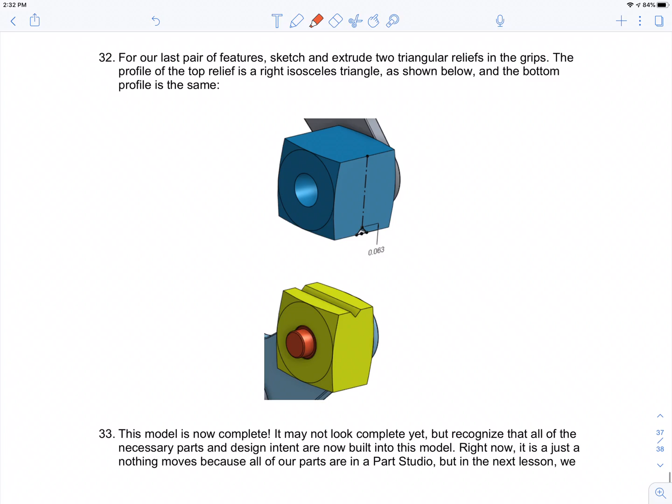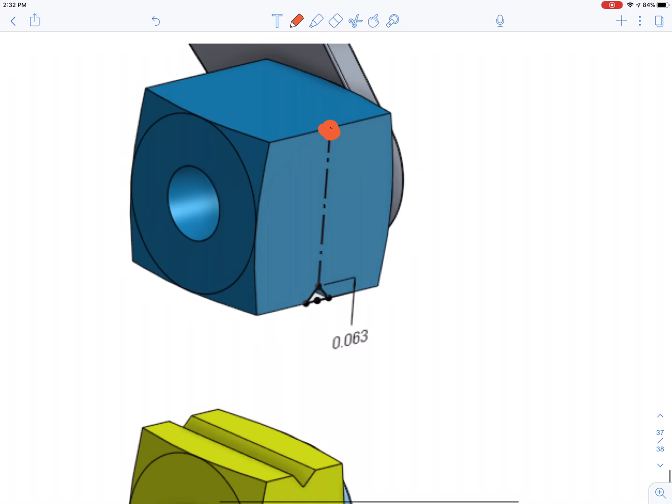For my last step, I'm going to create this little ridge that you see here on both grips. What I need to make sure I note is that this line is attaching this midpoint with this midpoint right here.

That's why I'm going to draw that line first. Then I'm going to connect two lines, just making them connect to any point. It's gonna look like that basically. And what I'm gonna do is set them equal to each other, clicking one and setting it equal to this one over here, so they're both the same length.

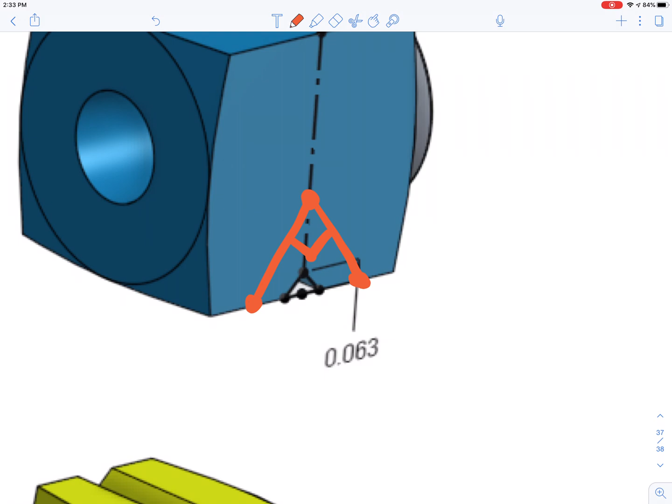And finally, the last step I'm gonna do is set them at an angle perpendicular to each other. Then I'm going to set the distance between this point and this point to be 0.063, and that's how I'm going to get this little notch right here.

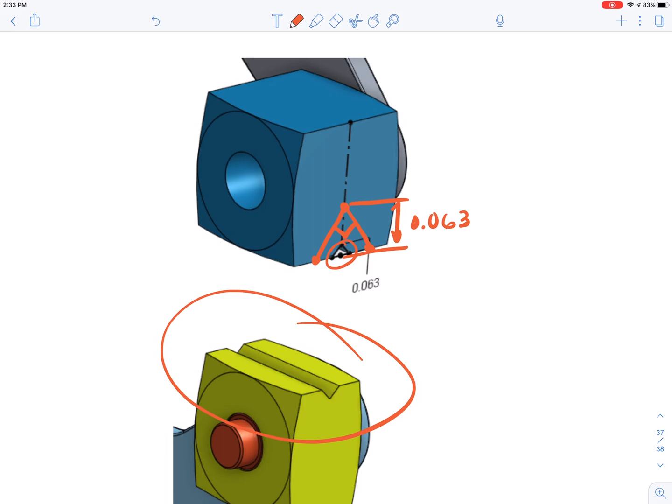After that, I'm just going to extrude it to the back face and I should be done. I can repeat that process for this piece right here as well, so I'm only going to do that once. That is the completion of the sketch of the clamp for lesson 3. So let's get on with it.

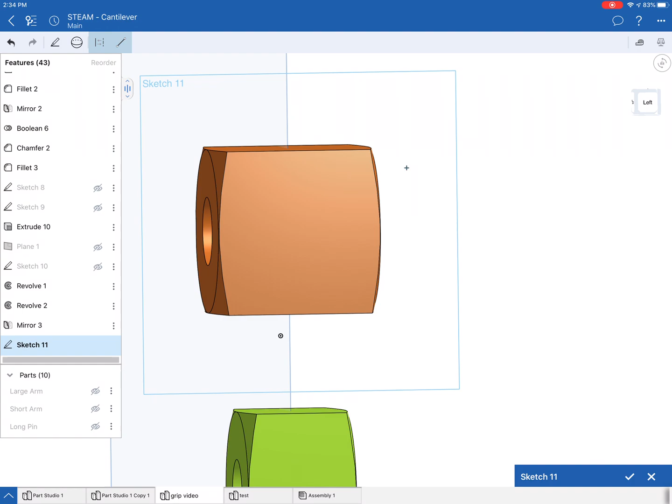All right, I'm going to click on sketch, and use this face as my sketch. I am going to click on line to make my construction line. And what I'm going to do is, let's click on that.

I want to angle it a little bit. So I'm going to click on line, sketch, and let's undo that line. Click on line, construction, somewhere in the middle, good. So that line is set in the middle of my sketch. I forgot to unclick line, so I drew an extra line I don't need.

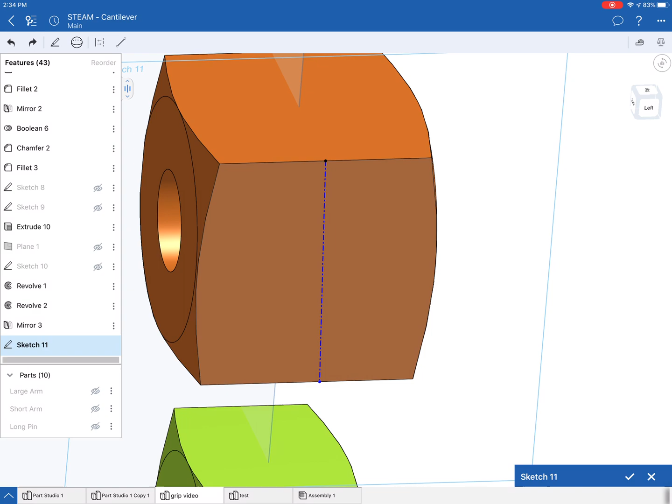Now I'm gonna draw my other two lines, and those two lines that I'm gonna draw to sketch out the little notch are not going to be construction lines. So I'm just gonna do a line from anywhere, as long as it's touching.

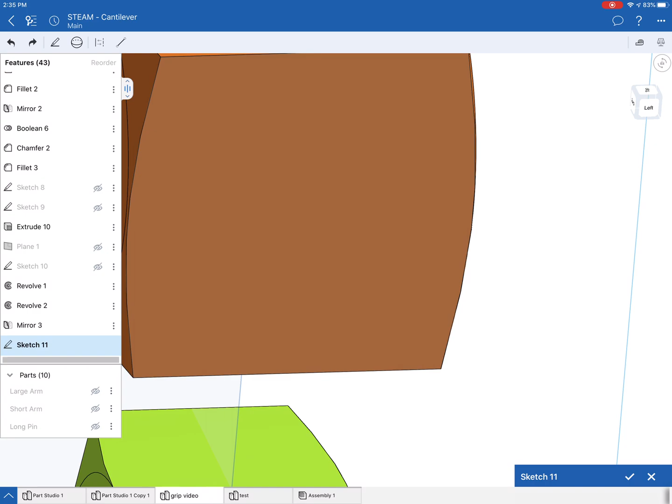This takes forever too. As long as the line is touching, I did it again, let's do it again. This line and this line at any point, and then this line. Boom, I'm done. Now it looks like it's perpendicular, but that doesn't mean anything.

I'm going to click on this line, click on this line, and set them equal to each other. Boom, boom. Now, obviously, they're not at right angles to each other, right?

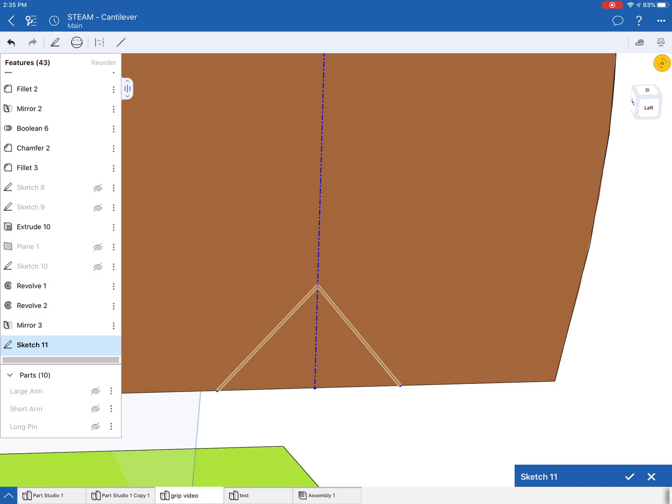What else I'm going to do is make sure that this line and this line are perpendicular to each other. So I'm going to click on this. Boom. So now it's an isosceles triangle, and that's what I want it to have.

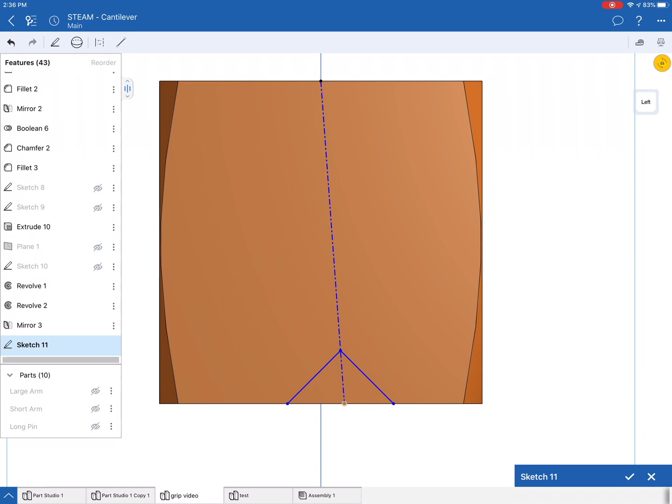And let's do this left. That line is not set to the midpoint of this, so I'm going to click on this, and click on this line, and say midpoint, and now we're set up on the midpoint. Now we're set straight. So this is our right angle, and these two lines are set equal to each other.

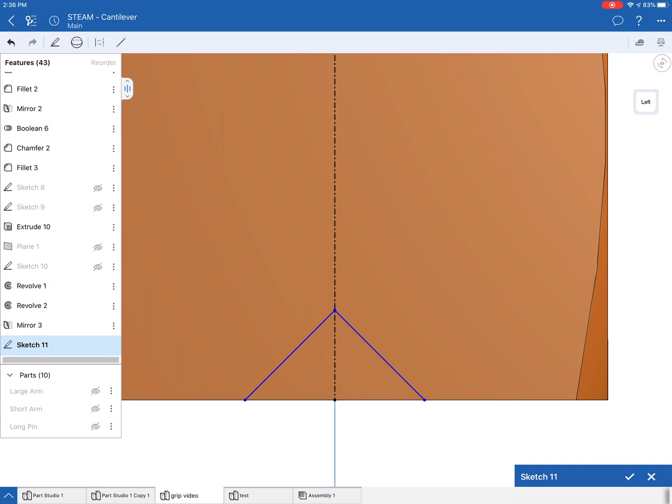The only thing I have left to do is make sure the distance between the vertex of the triangle and its base is 0.063. How I'm going to do that is click here, click dimension, and click that point and this point, and set my dimension to 0.063. Boom, I got exactly what I need.

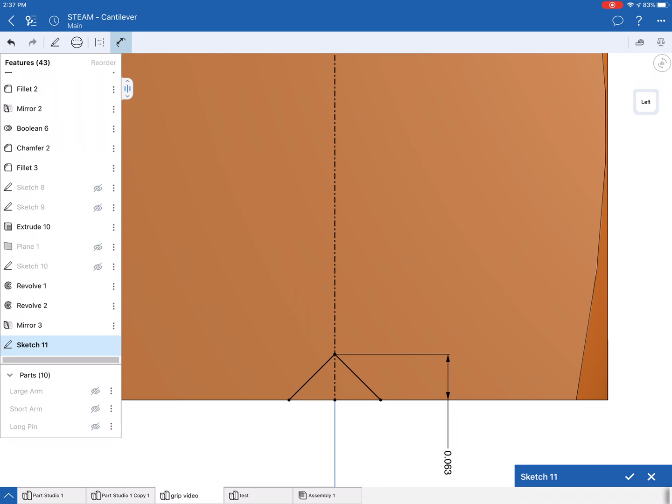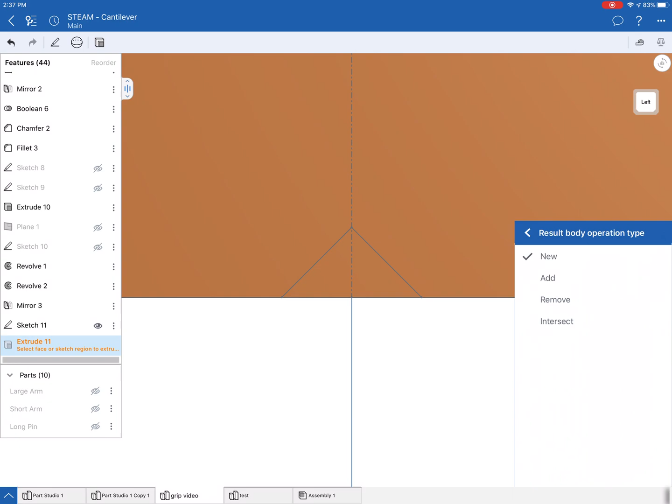I'm going to unclick dimensions, and now I'm good to go. So next step is to extrude that piece all the way through to the end and remove it. I'm going to click my object menu, extrude, and click on here, and it's going to say remove. What entity has been selected?

I haven't selected anything. Face of Sketch 11, no, delete that. So no entity selected. Now what I'm going to do is click on this. Boom, and it's been removed. Now it says blind 1 inch, right?

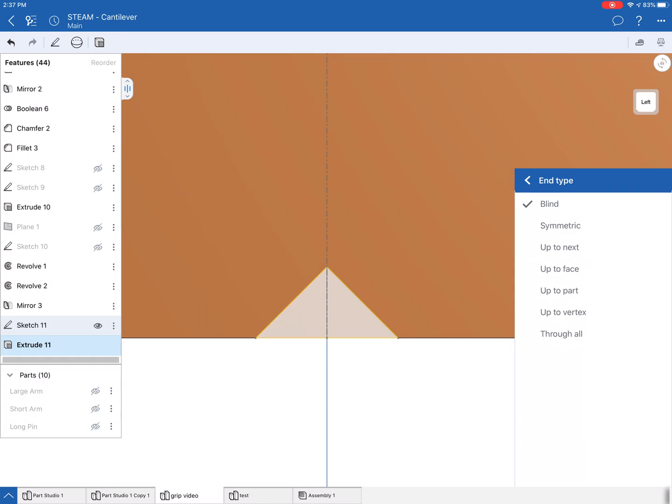So what I want to do is use up to face to make sure it goes to the right place, because if I have other pieces along the way of that removal, your clamp is gonna be missing a triangular piece somewhere. So all I wanted to do is remove up to that face. That's it, and oh no, I messed up.

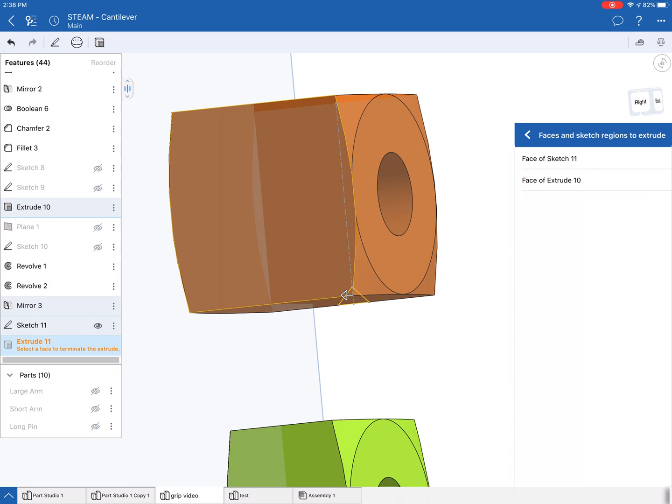So I'm gonna take off that face. Okay, so up to face, I'm gonna click here and boom, now I have my notch, and that's exactly what I want it to look like. I click OK and I'm done.

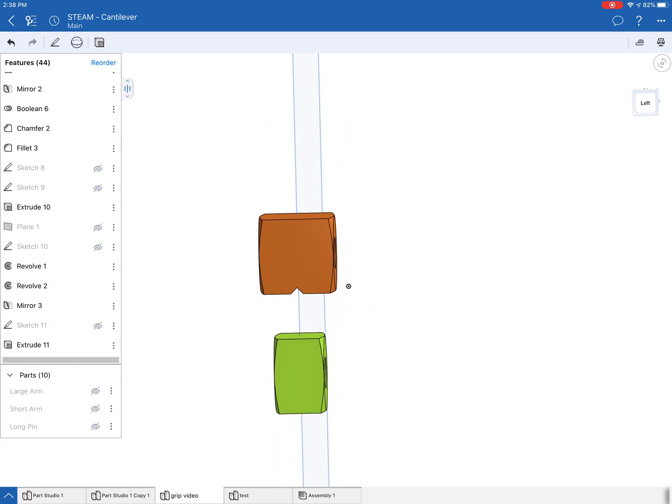I'm gonna repeat the same process for the drawing down below it, but it's gonna be on the top part because those notches have to match each other. Your end result is going to be something like, oh sorry, that's the wrong one, it's gonna be something like... eventually it will load... something like this.

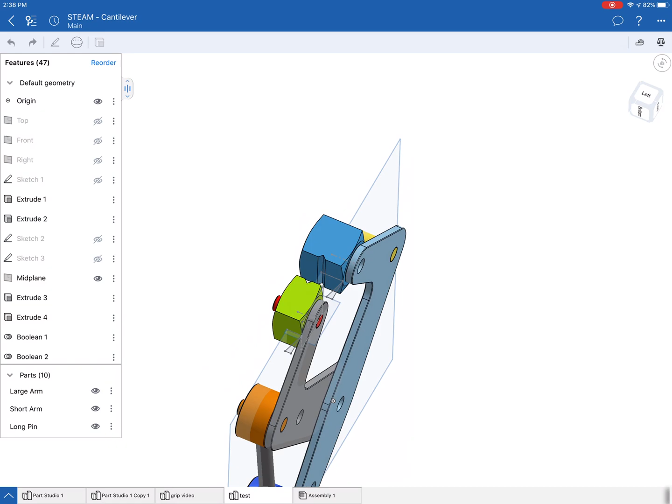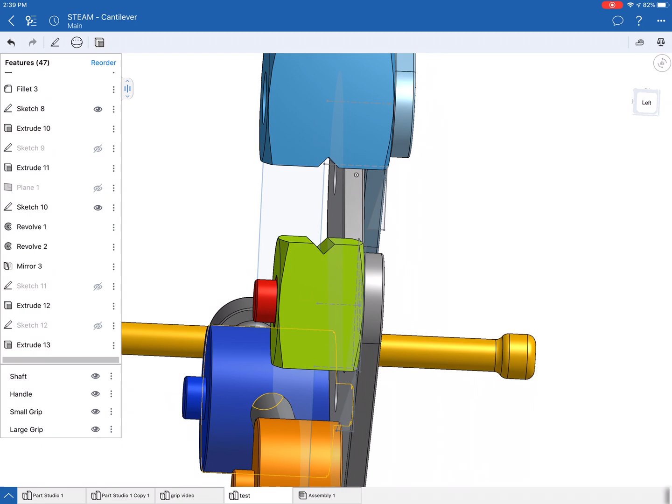And that is your clamp with the 2 notches. What I'm going to do is remove some of these sketches so you can see it. Plane one removed. And yeah, that's it, all my sketches are removed, and you can see.

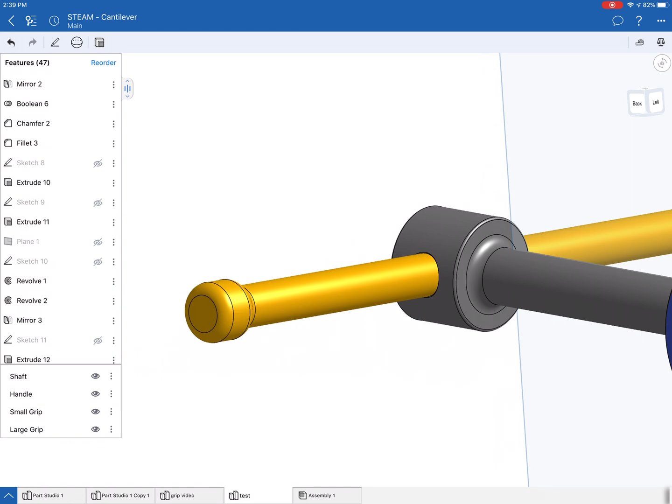That's my clamp, that's how your clamp is supposed to look after you're done with everything. All your pieces, smooth transitions where it belongs, chamfering where it's asking you to chamfer it, and your grips. Any questions, feel free to email me. That's it.